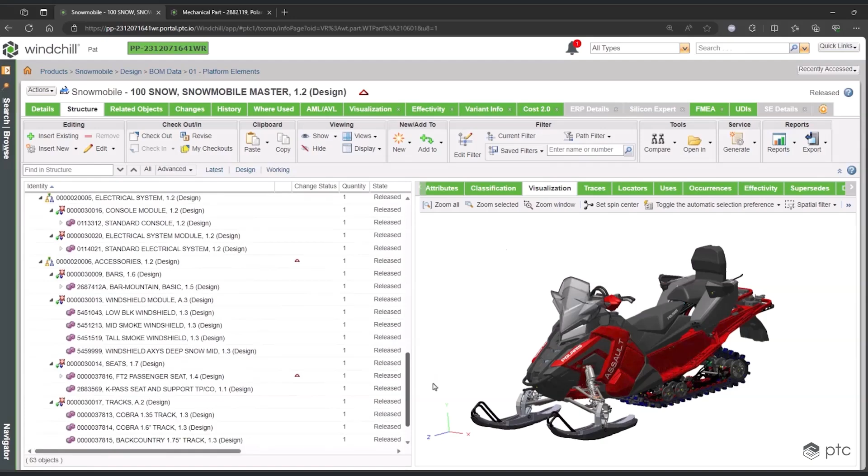There are also rules applied to all of this to control the choices that users across Windchill will be making as they create new configurations of this product.

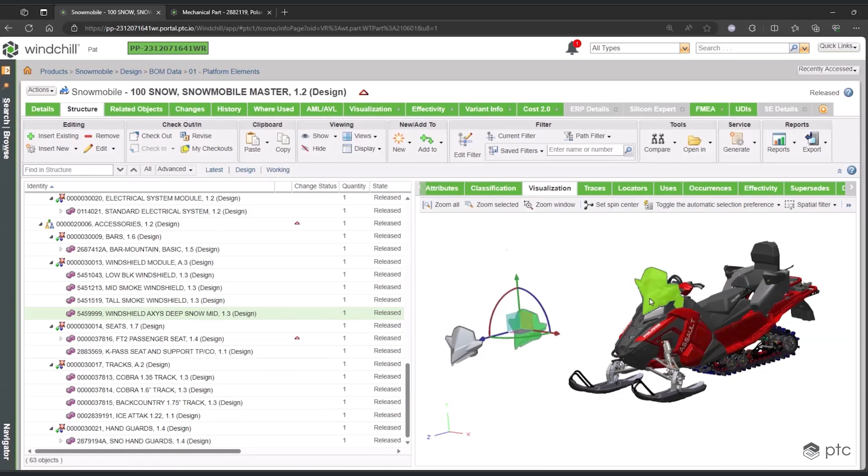The overloaded BOM also overloads the visualization. Just like when you work with any ordinary part in Windchill, the structure and the visualization work together. You've already seen how all of the options are laid out in the structure, and on the visualization it's the same idea. You can select any one of the different options or variants for any one of these modules, so you can get a graphical understanding of the different choices for each module on this product.

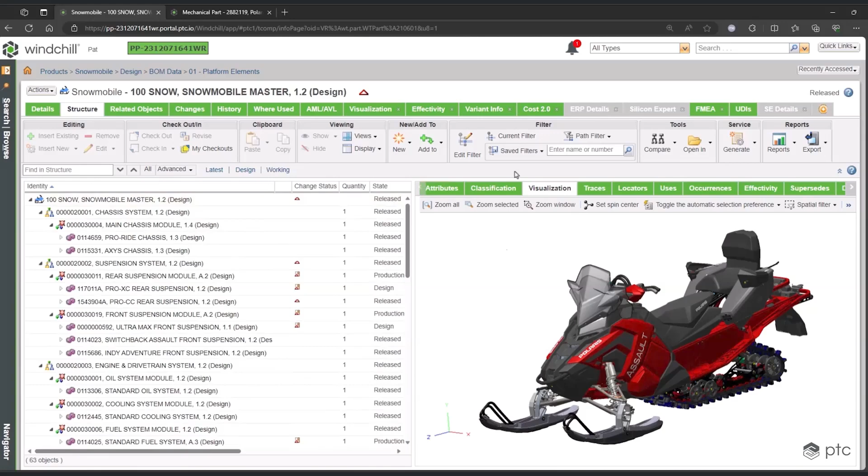So if this is what the overloaded product looks like, what about a configured one? In the filters, we can access and open all of the different configurations that have been created and saved for this product.

We'll look at the 600 Indy in this particular case. Right away, you'll notice a few things. The visualization is updated, it's not overloaded anymore. This represents the choices that have been made for this configuration, and the same goes for the structure. Rather than seeing all the choices laid out within each module, you're just seeing the one that someone has selected to create this new configuration.

As they were selecting it, they were adhering to the rules that have been laid out, so that as they create this configuration, they can be assured that this is going to be a manufacturable product.

If we want to look at one of the options for this configuration, the standard hood, as we expand this, the structure might look a little bit familiar. It has gray gear icons for WT parts, and that's because in order to build these configurations, we're using the same parts and assemblies that we would use on any other product, any non-configurable product, and potentially on other products you have across Windchill.

If we go ahead and open this up, what you'll see is this subassembly is a very good example of a part that could be used across products, not just configurations. This might be the same gauge that we use on our Polaris dirt bikes or on the Polaris four-wheelers. You can see everywhere a part is being used just from that one Where Used tab.

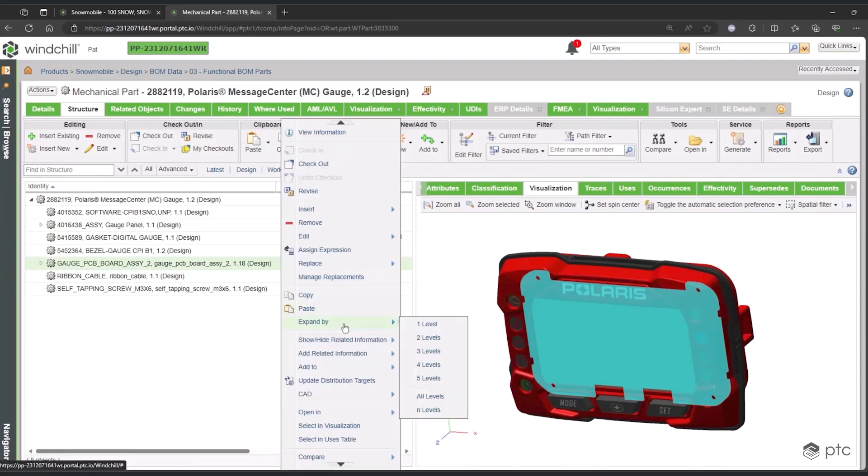What's interesting about this part is it does a good job of showing Windchill's part-centric focus. And when we say part-centric focus, the idea is to have a fully defined digital product, to have real visibility and understanding of your products.

You have to be able to see everything that comes together to define these objects: mechanical designs, electronic components, schematics, the hardware you're buying from different suppliers, and the software that makes these objects function. All of that information is being captured in this part-centric bill of material.

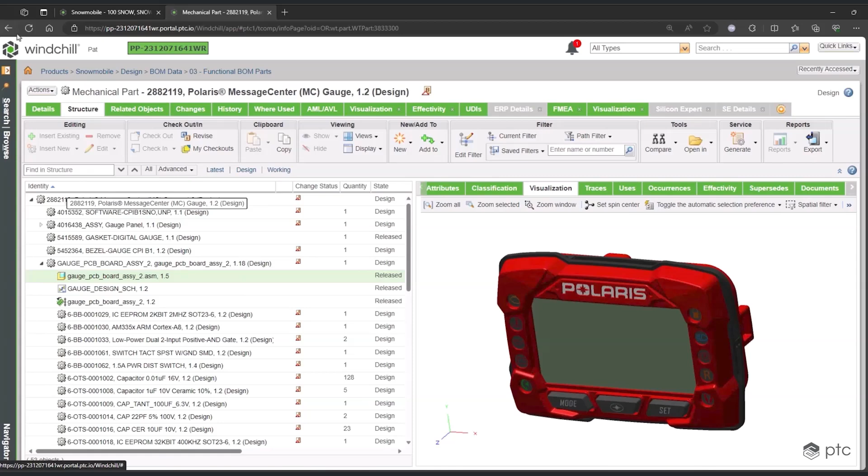And then it's carried with this part anytime we use it in any capacity across Windchill. That way, we can ensure when changes happen, you have a complete understanding of everything affected by the change, and they can update that content as needed.

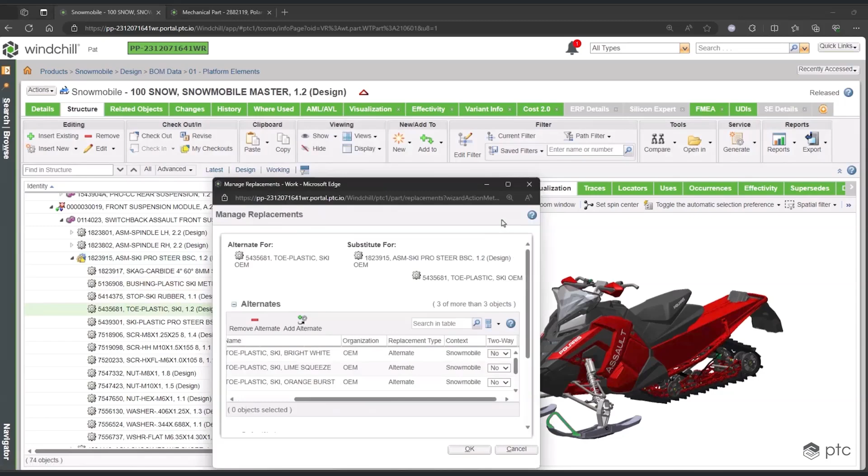Back in the product structure, there's another subassembly we're going to look at, in this case the skis on the front of our snowmobile. Along with the configurations, we also need to capture replacement parts. With replacement parts, we're able to identify them as either alternate or substitute parts, and then interchange those anywhere we need to. Those interchanges can be defined across Windchill as a whole, or strictly within this individual product.

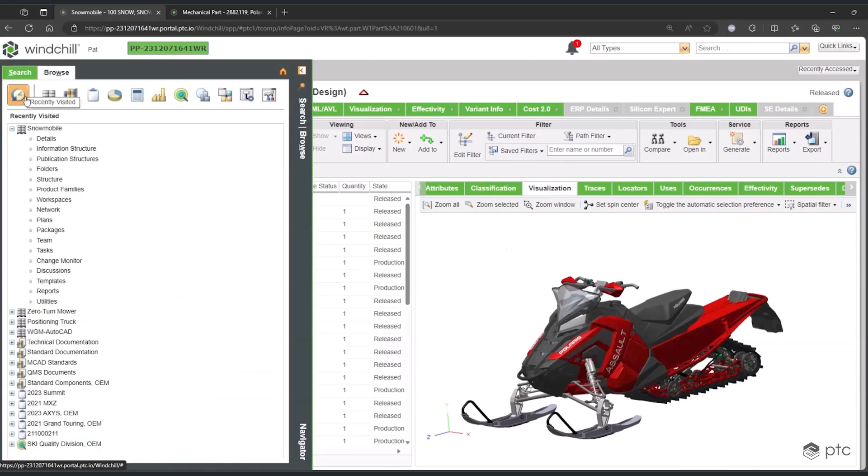Now that we've seen where all the variations are viewed, how do they get there to begin with? All of that is done through our option pool and our option sets. Opening up the Details tab, you can see all of the options possible for this product. It's an overloaded set of options used across all the product sets. There's also rules and the compatibility matrix to see visually how everything comes together.

If you look at the structure on the left, which are simply your different modules laid out, we can take any one of these. Let's say here we want to look at the engine, specifically the 600 CleanFire engine. By clicking it, we can get a Where Used table that shows everywhere this particular configuration of this engine is being used across different configurations, across different option sets, and across individual products, everywhere from one screen.

Now that we've seen BOM management, how we manage the options and variants, let's create a configuration. This is what you're going to manufacture and sell.

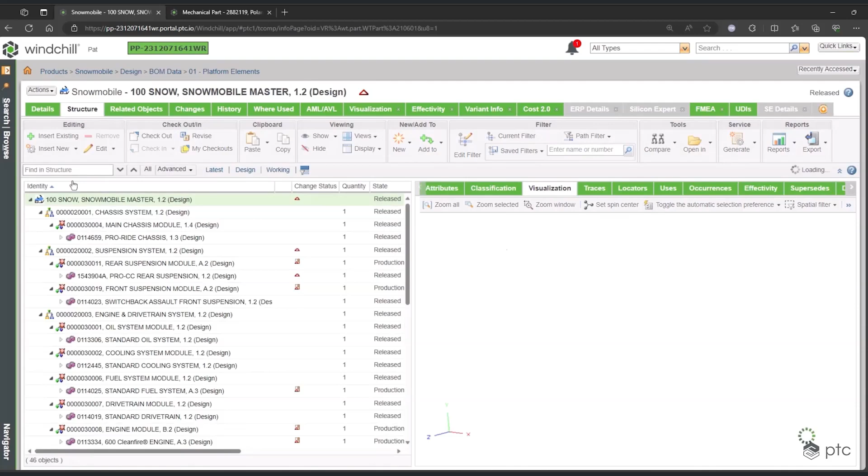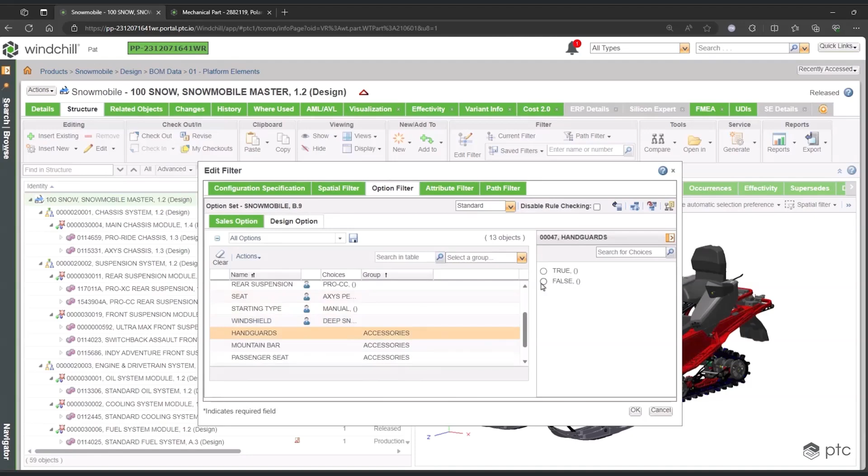To start creating the configuration, we will start by using the Edit Filter tool. We can go through this list and just start selecting what we want. It's very easy to do, and if there are rules in place, that will limit what we're able to select. As we go through and select all of these options, it's going to adjust the structure on the left to reflect the choices that we've made, and the visualization is also going to update to reflect those same choices.

Once this has been created, you can save this filter, give it a name so you can call it up later and reuse it. We can also create a new configuration specification with a parts list that can be sent to an ERP system to complete the customer order.

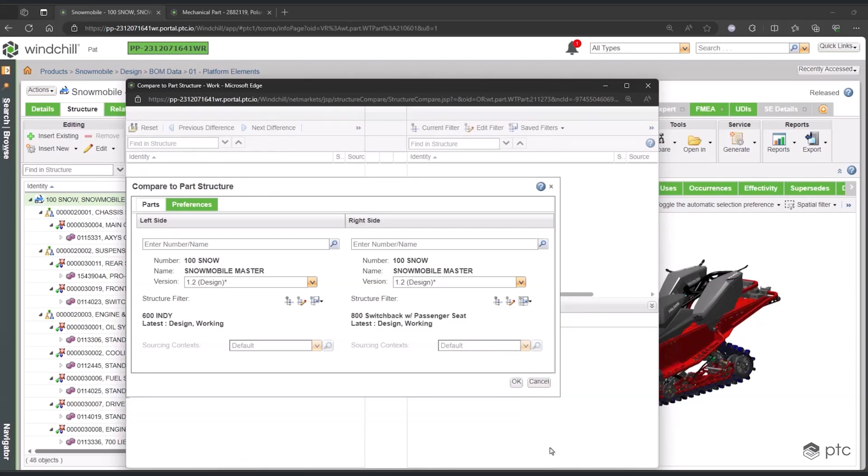Once we've created this new variant, the next thing we want to do is compare this to other configurations, or maybe compare it to a previous baseline we created to see how this configuration has progressed or changed over time. The way I'll set this up is for the 600 Indy snowmobile to be listed on the left and the 800 Switchback to be on the right.

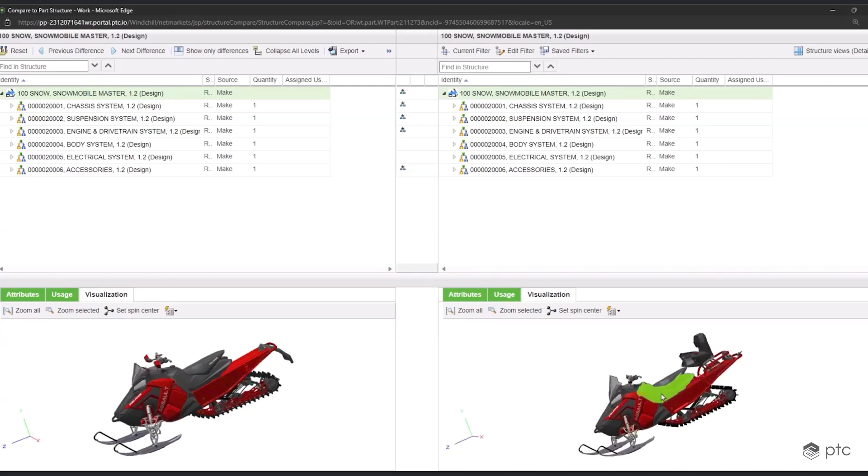These are two completely different configurations, and this side-by-side comparison that Windchill generates will give us a full understanding of the differences between these two configurations. It's going to do it from a part structure perspective at the top and a visualization perspective at the bottom. Going through one by one, we see each one of the differences between these two configurations of this product.

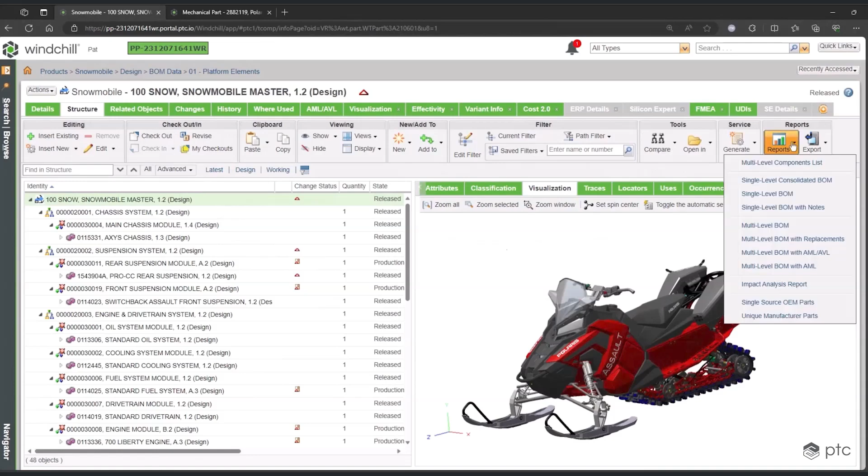Once the new configuration is complete, we generate a report of the selected choices, which is going to be the final bill of material, and we can take that and send it to our ERP system in order to complete the order.